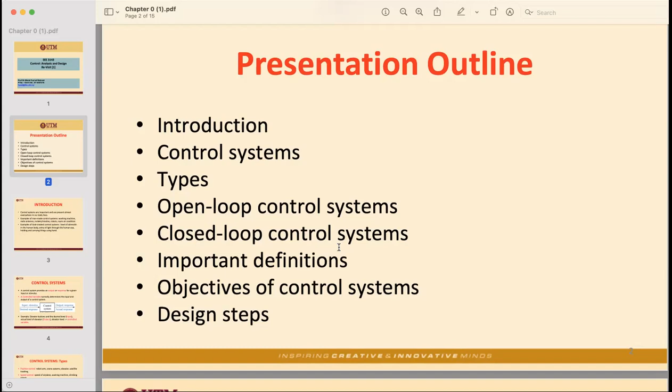So in order to understand this particular subject, you must have a good understanding on the modeling and control, which is last semester. Minimum pass, okay.

So as you know that control systems is everywhere in our lives. It's very vital, important. For example, in aircon system, for example in the vehicle, and many system, transportation and so on.

Basically on the man-made control system, washing machines, antenna for radio, or for the satellite, for astro dish and so on, for the military rocket and missiles, and particularly on the robots in the manufacturing system.

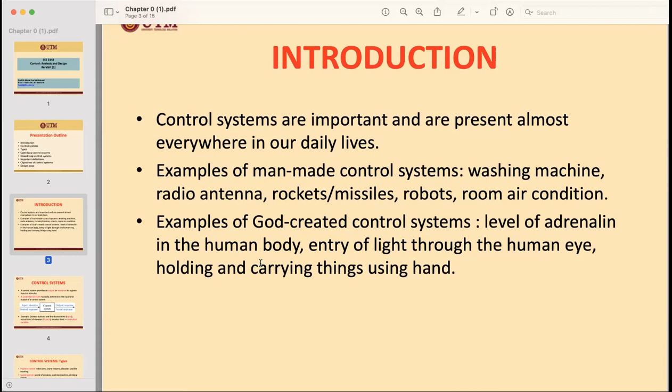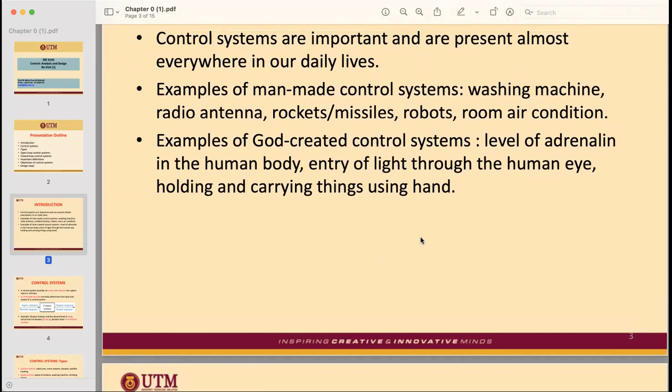Manufacturing factory. So for human, is also we have a control system, which is on the sensor, on the human eyes, where you can control and maneuver, and carrying things using hand. And also our body have chemicals that is what you call as a hormone.

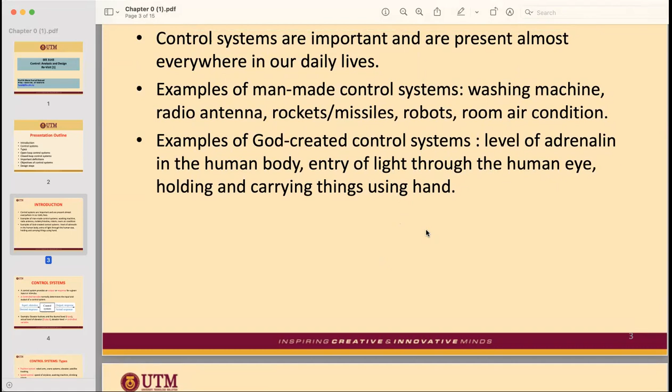For example, hormone to detect the blood pressure, the level of sugars in our body, all are using chemicals, which is also need to be controlled on top of the physical body of the human.

So basically, control system, when we talk, we must have input. That is a must. Input, which will stimulate the system, inside the control system towards the desired response, towards the desired set.

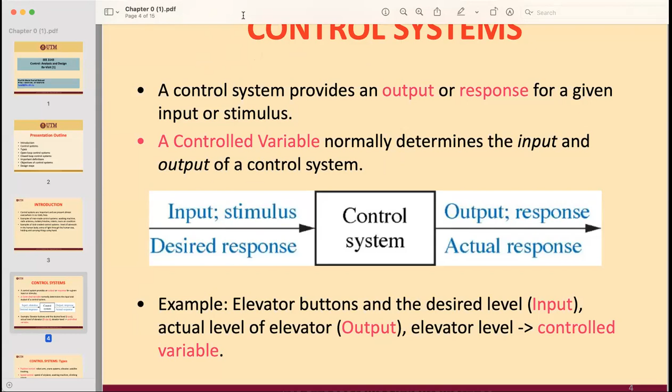And output response, which is the actual, the real behavior of the system, which will be the output. So, for example, in the elevator system, which is in many buildings, particularly in our faculty, we have 5 input elevator, level 1, 2, 3, 4, and 5.

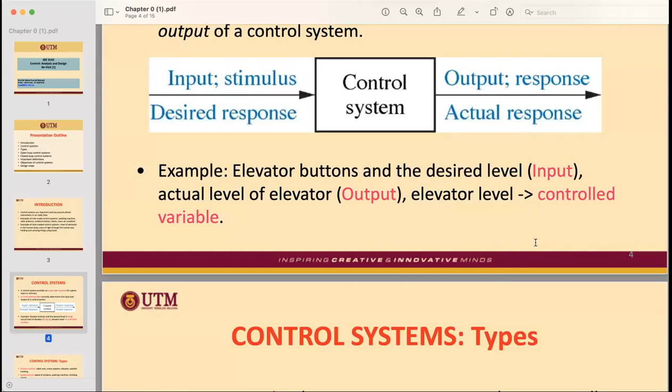So we press the level that we mentioned the input, and the output is the output of the elevator that will bring you to the required level that you want. And this is what we call a controlled variable.

So the types of control system, it can be position control, for example robotic systems, crane systems, elevator, satellite tracking, and so on, or speed control.

For example, for a car, aeroplane, washing machine, climbing robots, and so on. For example, in washing machine, you have slow rotations when it wash, and then high rotation when it spin, to remove the water from the clothes.

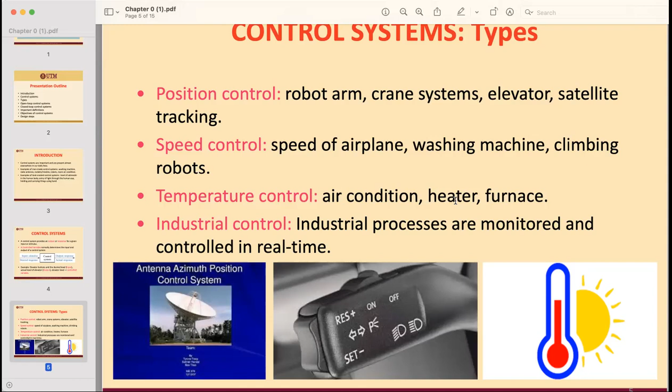And temperature control as well, where we control the temperature that we want. Let's say for a building, for a class is 23 degrees of Celsius. So the cold air will blow until the temperature of the room reaches 23 Celsius.

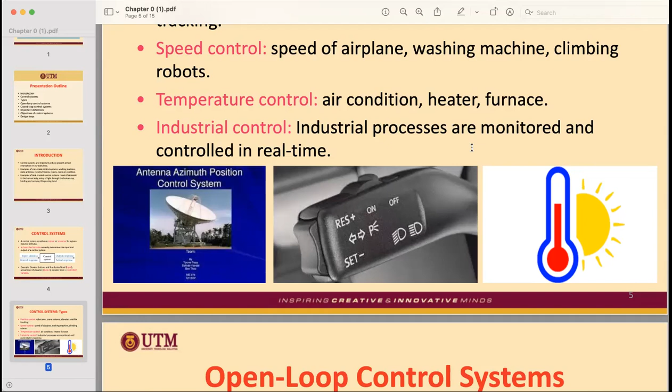And then for industrial control, for example in pharmaceutical industry, food industry, many process industry, all are monitored and controlled in real time, in the control room.

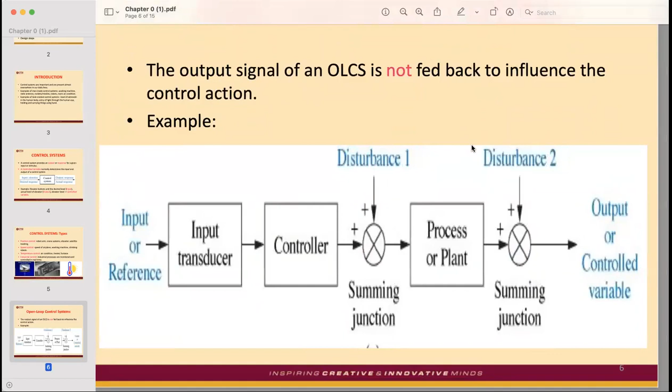So basically, we have the open loop and closed loop control system, where open loop is without feedback path. It's input, go to the controller, go to the process, and then output.

And for this particular system, a lot of disturbance from outside will enter to the system that create the noise, unnecessary signals, right? So the input or references is the signals that we want and the output.

But when the disturbance 1 and disturbance 2 enter to the system, it will mix with the input to create an output. So meaning that your output have 2 signals, the real output plus disturbance.

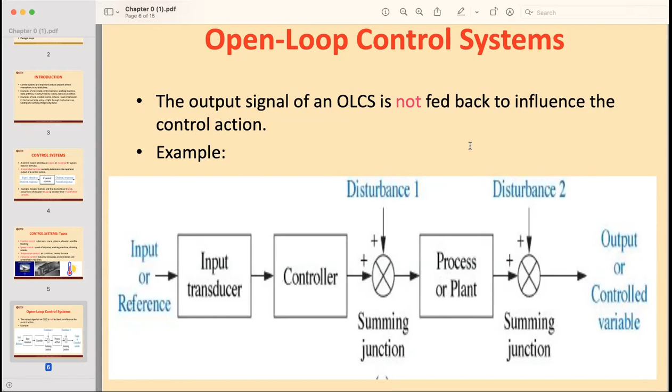So this disturbance must be removed as soon as possible. What is the example of disturbance 1 and disturbance 2? First is from the 3-pin plug of the wall, which will give you a 50 Hertz sine wave. So that will enter to the system. There you can see that the output signal similar like sine wave oscillations.

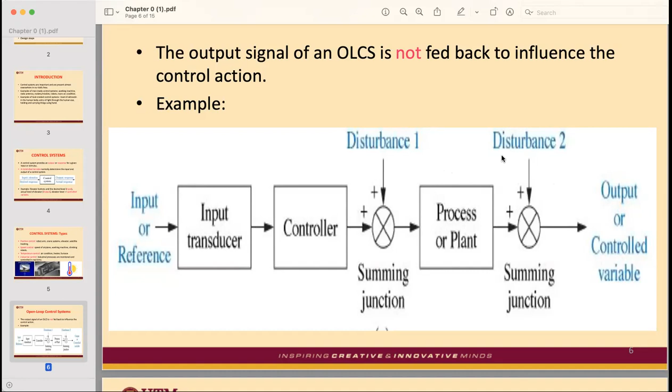That is because of the disturbance from the 3-pin plug at the wall. And it also can be come from the handphones. The microwave signals from the handphone also can enter to the system. So that's why when you conduct measurements of a control system, you must make sure that all these disturbances must be removed.

And the closed loop system is where the output signal is fed back to the input, okay? Feedback meaning like this - the red color goes to the input. So you can see the circles which consist of a cross inside, we call it a comparator. In reality this comes from the summing amplifier, the operational amplifier configured as a summing amplifier, so it becomes a summing junction. We have three here, one here and one here.

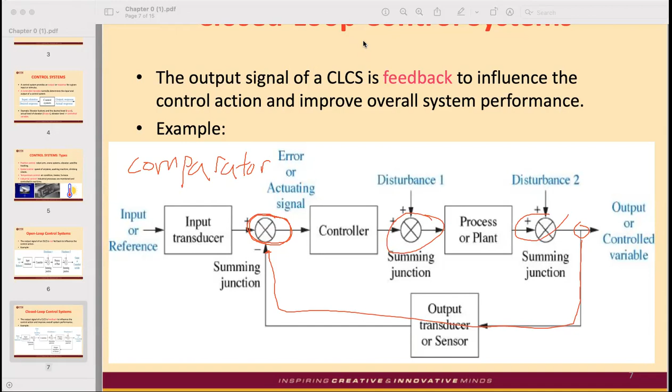So at the feedback path of the closed loop system, there must be a transducer or sensor. This must be hardware - there is no software that can replace the transducer or sensor. It must come from hardware, which will detect the physical signal and convert it to the electrical signal, consisting of voltage and current.

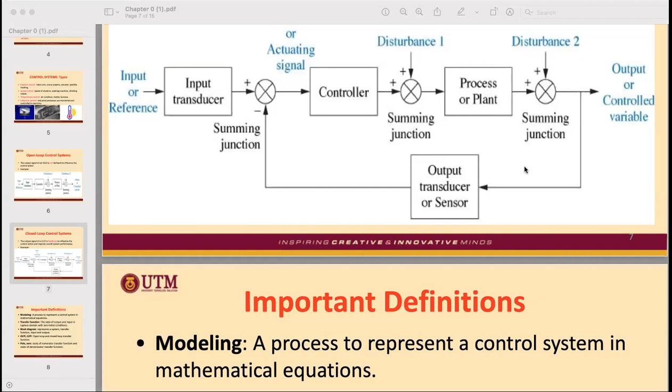Examples of physical signals: heat, the degree Celsius temperature, is a physical signal. What else? Let's say 5 bar - that's a pressure unit, pressure is known as a physical signal. Level, for example 10 centimeter, that is also known as a physical signal. All signals that are not electrical based, either voltage or current, are known as physical signals.

That's why some definitions need to be understood, that's why we revisit here. For example, modeling - this is the subject you learned last semester, where we model the system based on the transfer function and state space. So it represents the control system in mathematical equations. Even humans have their own mathematical equations, which are different from one person to another.

Boys and girls also differ in terms of their emotion, physical signals, emotion, and brain signals - it's not the same, the mathematical equations. And these transfer functions are actually based on a ratio of output versus input, with zero initial conditions. And the state space has a state equation, x dot equals ax plus bu.

And the output equation y equals cx plus du. So this is known as the state space representation. So we have two types of models here, transfer function and state space. Both can be used, it depends on the way you want to model it.

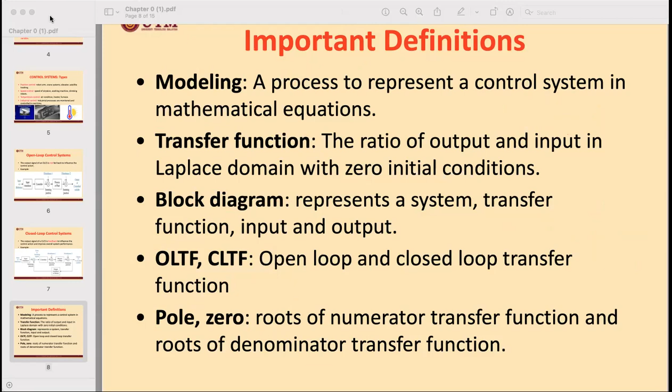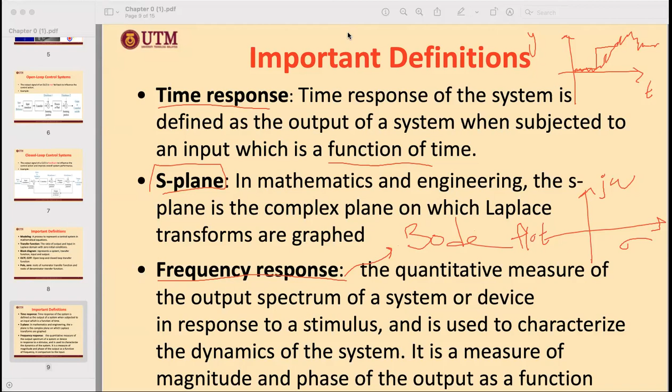And then it can be represented in the S-plane, as I told you before. S-plane is a complex plane in the Laplace transform where you have a real axis represented by sigma, and imaginary axis represented by j omega. It's a complex number that can be mapped to the graph using a linear graph. In our subject, we learn both the time domain and the frequency domain. Of course for frequency domain we don't use a linear graph, but we use a Bode plot to represent the frequency response, the output, which will be discussed in a future chapter of the subject.

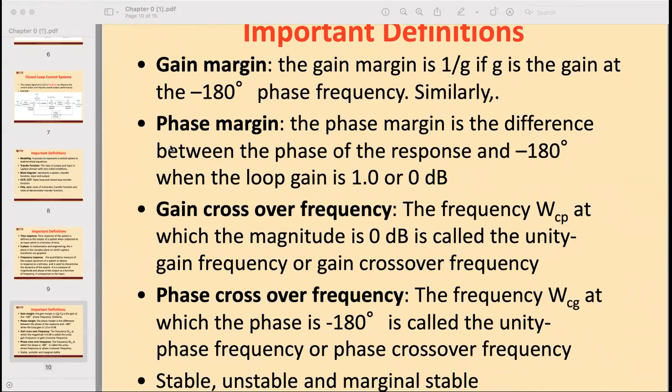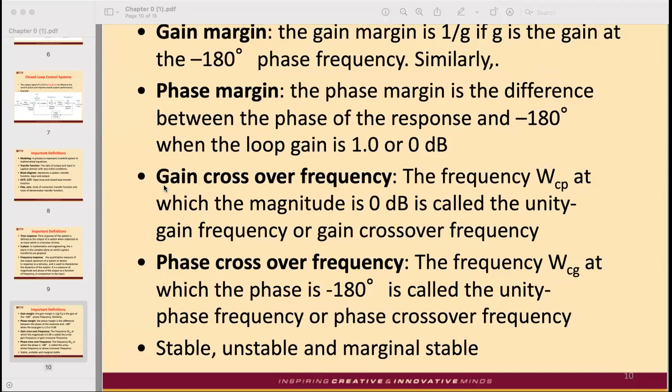And then we have a gain margin and phase margin, which are obtained from the frequency response Bode plot. Okay, and then we have a gain crossover frequency and phase crossover frequency. These five, gain margin, phase margin, gain crossover frequency, phase crossover frequency, and stability, are the 5 important components in the open loop Bode plot response. Okay, frequency response.

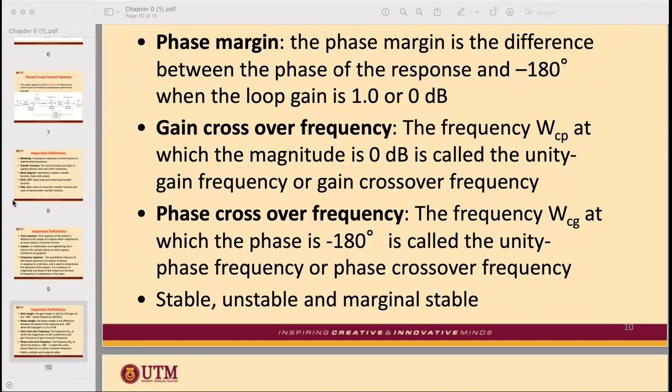So we will use this in chapter 3 and 4 in the design of compensator using frequency response, which will be lectured in chapter 3 and chapter 4. So from the time response and from the frequency response, our objective is the same. We want to make the system stable with a fast response, okay?

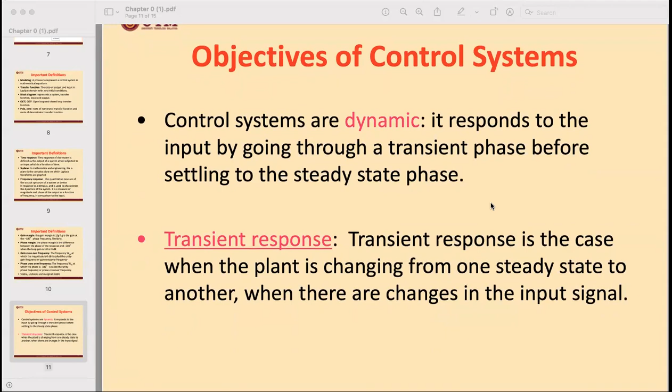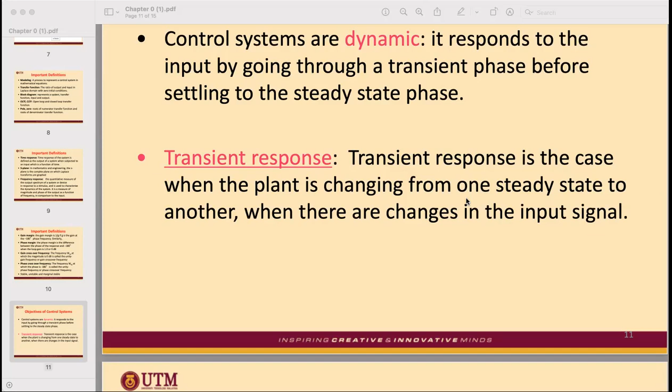Because control system is dynamic, okay? It depends on the input that you injected to the system. And we want to see that the output response settles as soon as possible, and then must have less steady state error plus be stable. Okay, so that's why we observe the transient response, to see whether the system has a steady state error or not. Steady state error is the error during the steady state phase of the response.

Stability. We cannot compromise with unstable system because unstable system is very dangerous to human life and towards the whole system. For example, if you go by aeroplane, if the system is unstable, it will crash down. The aircraft will crash down or suddenly vanish from the radar. MH370, okay? That is a mystery. Unstable system.

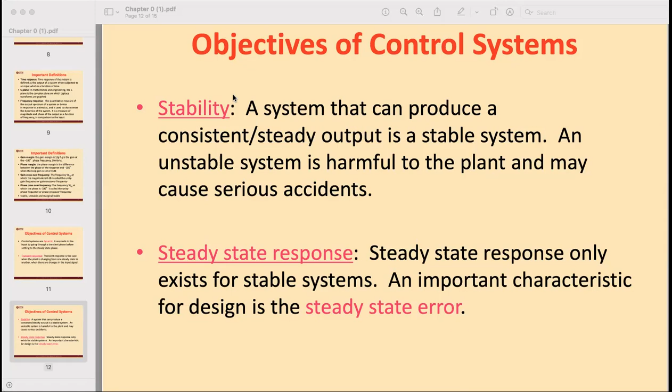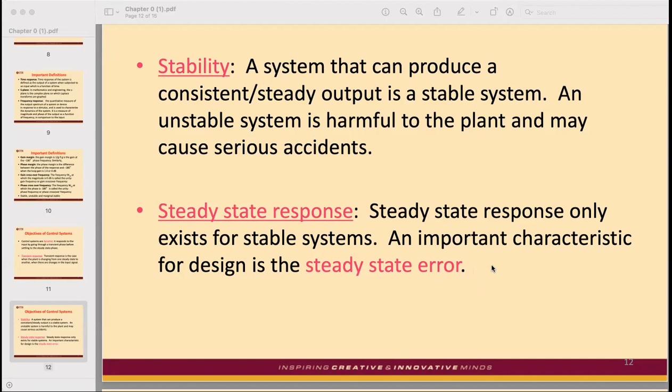So we must make sure that the system is stable for human life and safety, and then the system has a very small steady state error, okay? The good one is 0. The steady state error is defined as the difference between the input and output at steady state. The good steady state error is 0. But if you cannot achieve 0, something like 0.1 or 0.01 is already good enough. Can be accepted.

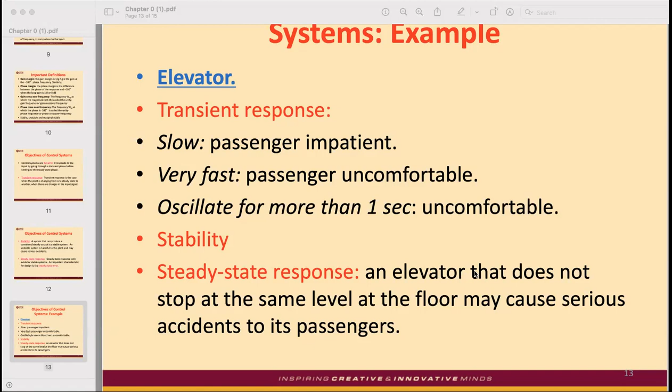Okay, so to describe the stability of the system, we look at the elevator. So elevator is based on the transient response. If the elevator is too slow, the passenger will complain and be impatient. If the elevator is very fast, we will feel uncomfortable, and it will cause vomiting. And if the transient response of the elevator oscillates more than 1 second, it will become uncomfortable. That's why stability of the elevator must be as good as possible, plus a good steady state response.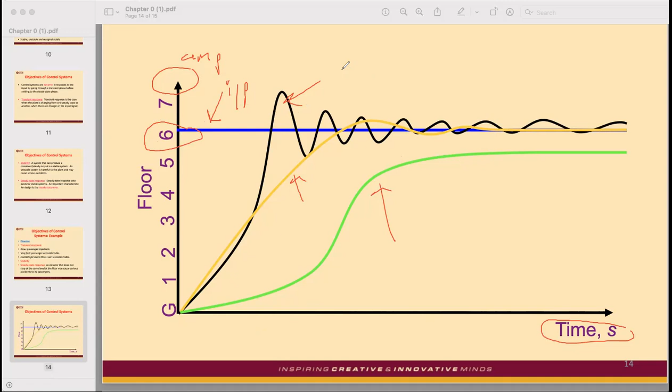One is oscillating. This one is slow. And the yellow one is acceptable. Not too slow, not too fast, but acceptable with 0 steady state error. You can see that for the green response, you have a gap here. So this gap is known as ESS, steady state error. Everybody follow me. ESS, steady state error.

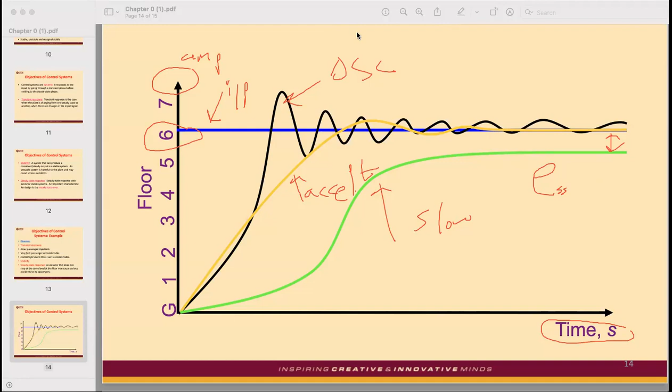Hello? Everybody follow me. ESS, steady state error. Yes. I can't hear you. Yeah. Okay.

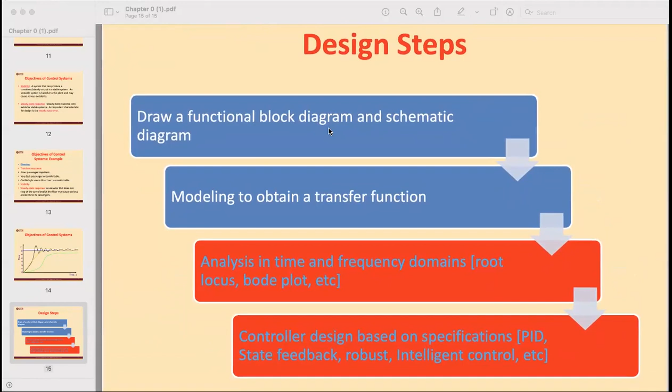So design steps. Okay, design steps are shown here. If you want to design a system, first you must draw the functional block diagram and schematic diagram. And then start to model the system. So you must obtain the transfer function. And then you analyze the time and frequency domain using root locus and Bode plot.

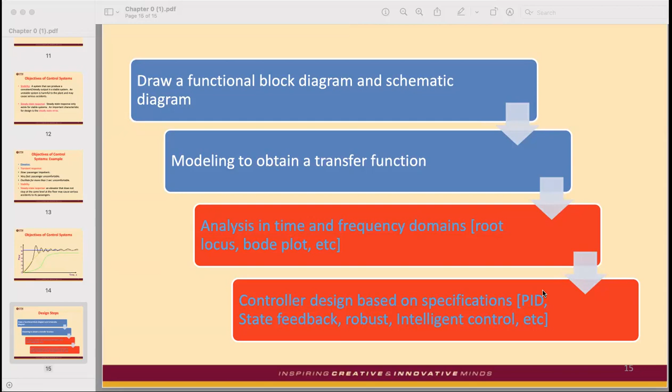Root locus is the tool to design in time domain, while Bode plot is the tool for design in frequency domain. And then after that, design the controller. So PID or state feedback or robust or intelligent control system. In our subject, we focus on transfer function and PID controller. The other controllers will be learned in the elective subject. Okay, that is a revisit of the introduction. Any question?

Any question, guys? No, for now no question. Okay, if no question,

Iqbal Ihsan, brother Iqbal. Yes, Doctor. I have one question for you. What is the hardware that will be used in a control system to represent a summing junction? Okay, cannot answer. Brian? I think comparator. Using what hardware? Component. Using operational amplifier, I'm not sure about that. Using operational amplifier. Yes.

Brian. There are two Brians. Brian Chong Ting Tong. Yes, doctor. I have one question for you since you have no questions. My question is, what is the S-plane? Explain. It's for the Laplace transform, to find the poles and the zeros. To map, to find the position of zeros and poles. Mapping. Yeah. The tool for mapping the location of poles and zeros. Thank you, doctor.

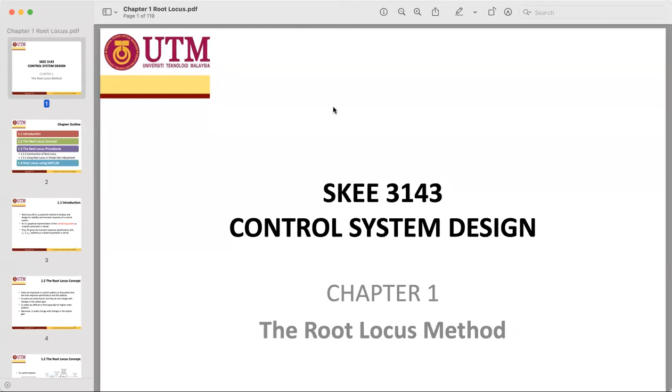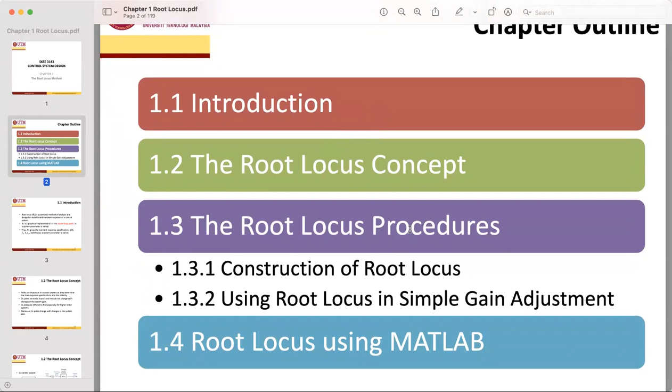Okay, let's go to chapter 1. Can you see chapter 1? Yes. Right, chapter 1 is about the root locus method. So in chapter 1, we will look at the introduction, the concept, the procedure, how to draw the root locus, to construct it, and to adjust the gain of the control system. And then, of course, we have to use software to assist our design and construction of a root locus, using MATLAB.

So what is MATLAB? Another Brian, can you answer me? Second Brian. Yes, doctor. What is the definition of MATLAB? MATLAB is an acronym. MATLAB is a software used to simulate. No, what is the acronym? M stands for what? T stands for what? LAB stands for what? I'm not sure about that. You're not sure? Okay.

Vicky Woon. Yes, doctor. What is MATLAB? I think it's matrix laboratory. Matrix laboratory, absolutely correct. Okay, it's a matrix laboratory. So please take note.

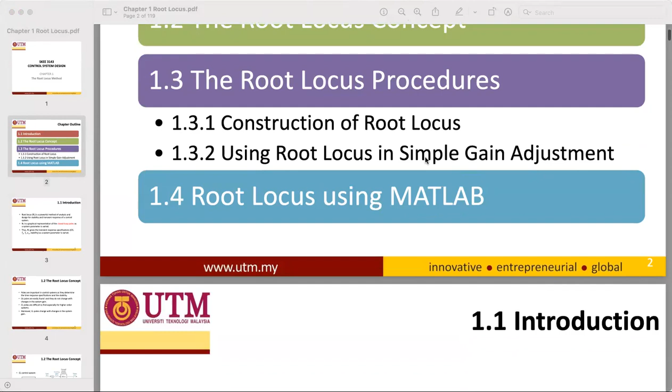Right, so as the introduction, what is root locus? Root locus is a method of analysis and design for stability and transient response of a control system. So when we have the mathematical model, the transfer function, output over input, you have a polynomial of the numerator, the top one, which represents the zeros, and the polynomial of the denominator, the bottom one, which represents the poles. So from these values, poles and zeros, we map to the S-plane, which is imaginary axis versus real axis. That's why you get a root locus drawing from there.

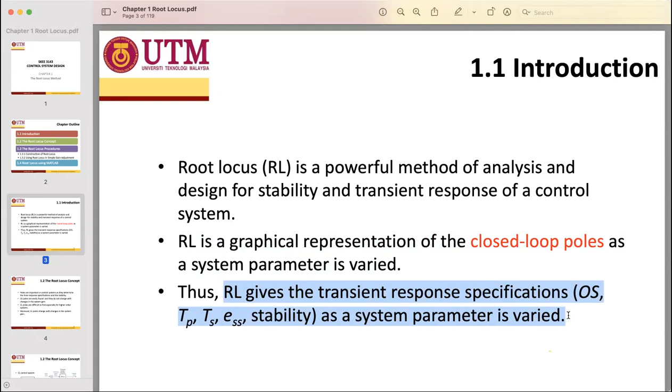specifications. For example, OS. OS is not operating system. OS is the overshoot. TP, peak time. T is time, P is peak. So the short form is TP, peak time. TS is settling time. ESS, E stands for error, SS stands for steady state. And then the stability of the system, to make sure that the system parameter is varied.

So the concept of, the concept is

Okay, poles are important in control systems as they determine the time response specifications and stability. So open loop poles are easily found. They do not change with changes in the system gain, while closed loop poles are difficult to find, especially for higher order systems. So here are examples of the difference between open loop poles and closed loop poles. Open loop poles you can take from the system transfer function and then map straight away, while closed loop poles are challenging because they are located along the root locus, with different gain values.

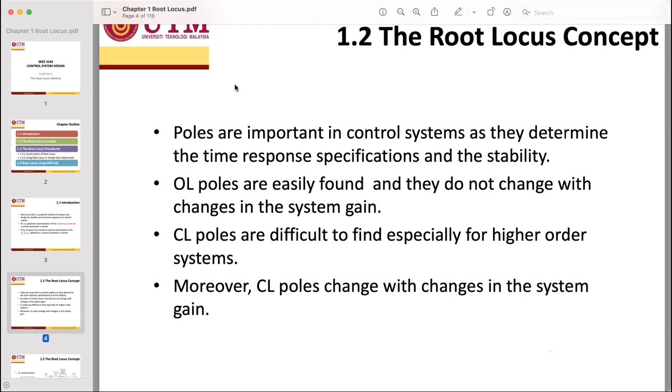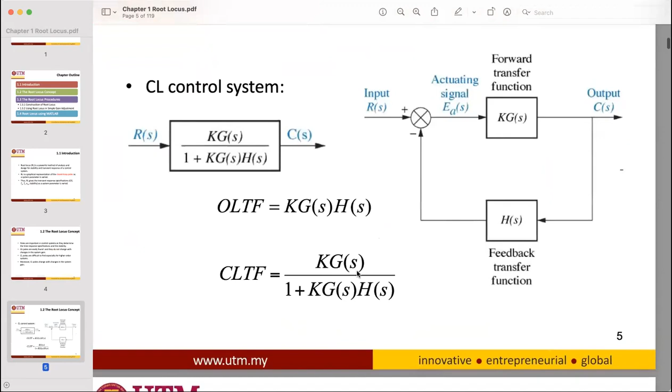So closed loop poles change with changes in the system gain. Once the gain changes, the closed loop pole values will change as well. For example, here you have a control system which is closed loop. C over R, which is equal to KG(s) over 1 plus KG(s)H(s). What is KG(s)? KG(s) is the forward transfer function. What is H(s)? H(s) is the feedback transfer function. What is this? This is the summing junction.

What is a summing junction? A summing junction is a summing amplifier from the operational amplifier, and there is the input and there is the output. And there is one wire here connected at the feedback, and then you can see these signals, we call them actuating signals, Ea. Actually it is the error, which is represented by the difference between the input and output. So as I told you before, the difference between input and output is the steady state error, and we call it the actuating signal, Ea, that gives the information to the controller and the system transfer function.

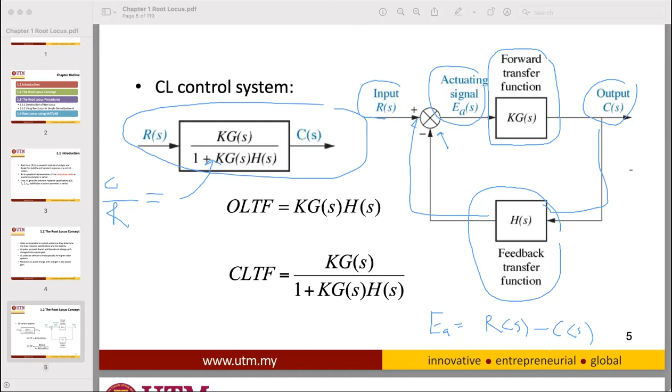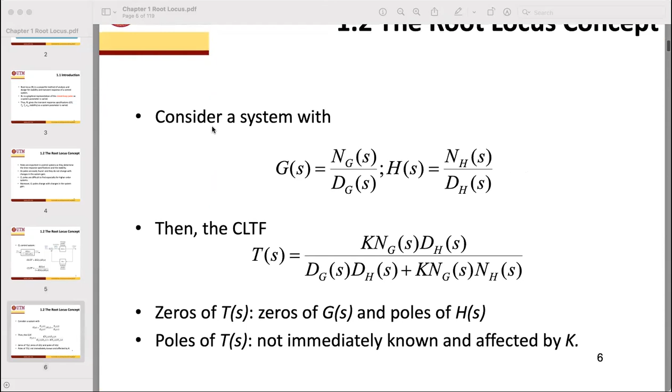Right, so the root locus concept is basically mathematics. We consider a system G(s), which is N over D, the open loop transfer function, and the feedback is H(s). So the closed loop transfer function is G over 1 plus G multiplied by H, which will give this type of equation, the closed loop. So this one is given, this one is given, and this one you have to derive, the closed loop transfer function.

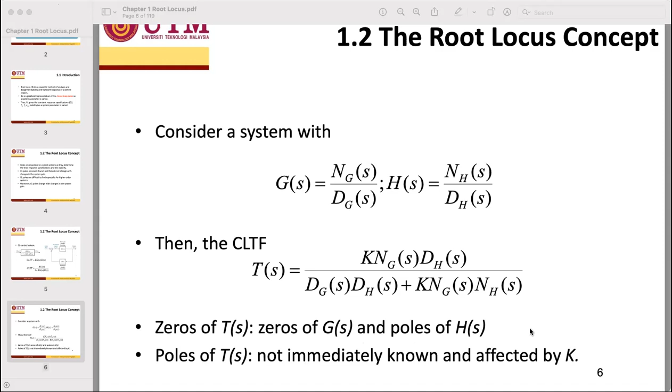So what are the open loop zeros? Open loop zeros: S plus 1 equal to 0, S equal to minus 1. What are the open loop poles? Open loop poles: S plus 2 equal to 0, and S is equal to 0 and minus 2. So this is the closed loop poles, and this is the open loop poles, and this one is the open loop zeros. So when we plot, you have a real axis, imaginary axis, and it will be located over here, zero at -1, -2, and over here, a pole at the origin. 0 is the origin, the center of the S-plane where the value is 0.

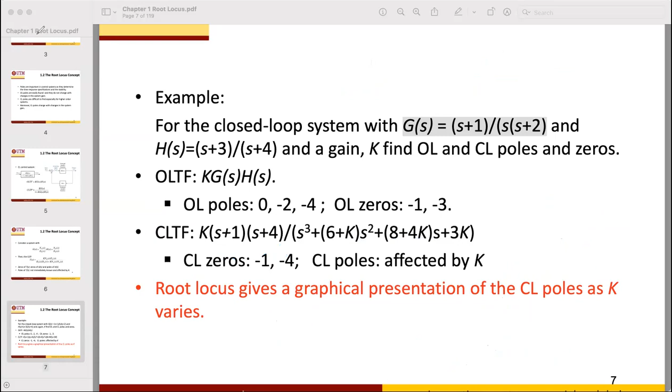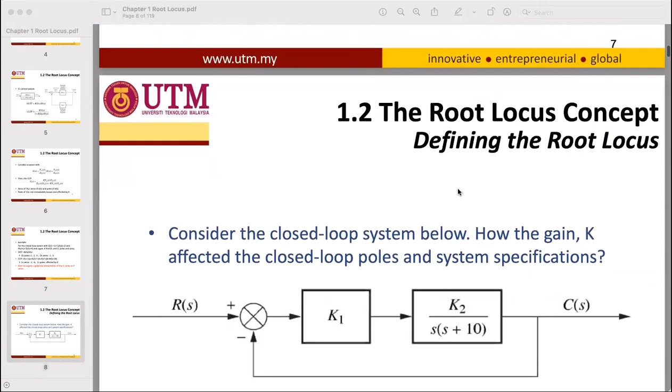Right, and then the concept to define the root locus is given by these examples, where you have two gains here, which is K1 and K2. Okay, this is K1, and is the gain for the control system. And from here, what is the open loop zeros? What is the value of open loop zeros? What is the value of the open loop zeros? So 0 and -10. Open loop zeros does not exist.

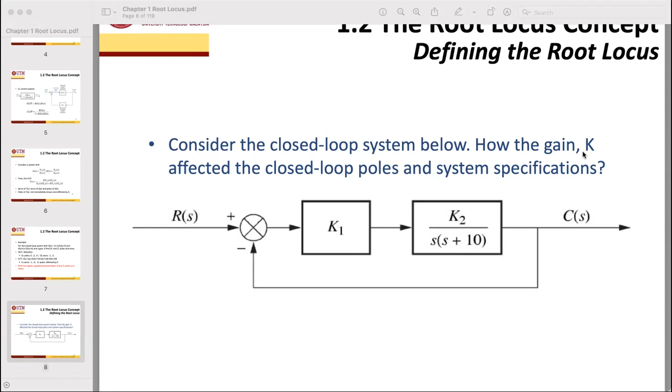Open loop poles is 0 and -10. Open loop poles. Okay. And open loop zeros does not exist because there is no polynomial with K2. Okay. So how does the gain K affect the closed loop poles and system specifications? So first you have to find the closed loop. So this is open loop and this is the closed loop.

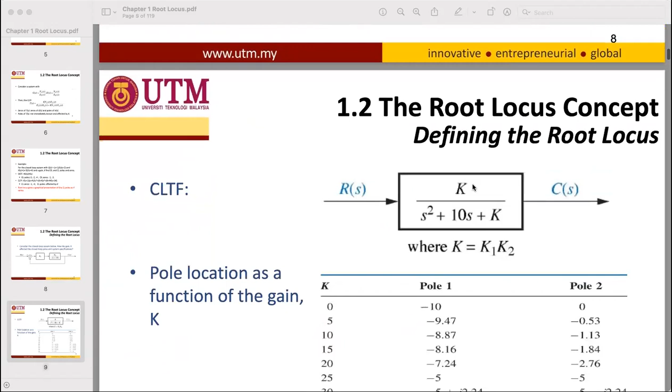So you let and assume K1 multiplied by K2 is equal to K. Okay, and then you find the closed loop. So you will get K over S square plus 10S plus K. So this S square plus 10S plus K equal to 0 is known as the characteristic equation. Repeat after me. Characteristic equation. Guys, characteristic equation.

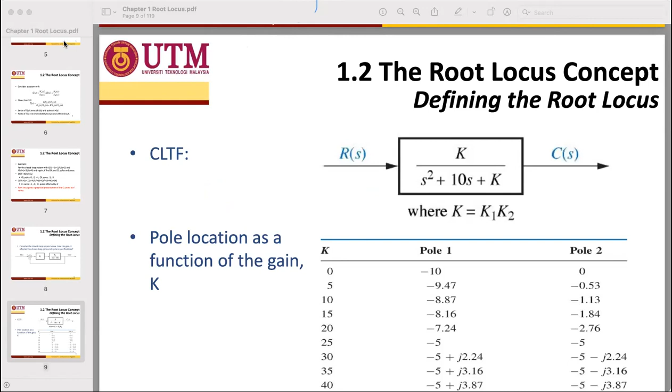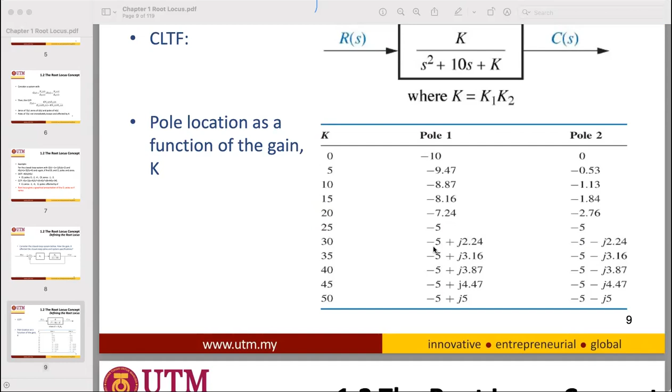So when this equation equals 0, it will give you the value of the closed loop poles. So when you give different values of K, it will give different closed loop poles, which are located as here: K = 0, -10 and 0; K = 5, -9.47 and -0.53; and when you increase to 30, it will give you closed loop poles in complex numbers, until 50. So this is the data.

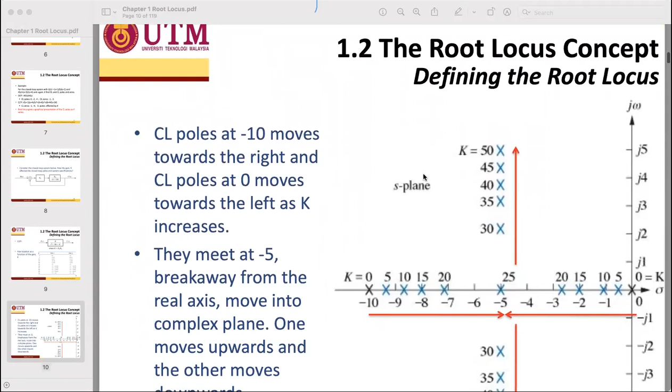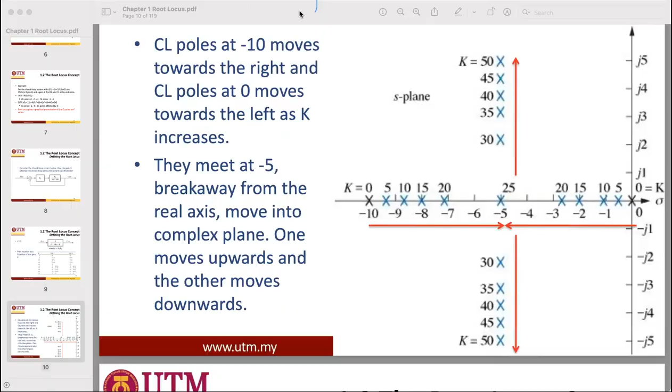So the data we plot into the S-plane, which is shown here. Okay, from -10 to 0 along the line, you have many closed loop poles, the blue color, which have different values of K. Okay, so the root locus paths from -10 and 0 will meet each other at -5, and then one will go up and one will go down. Okay, so it will give you different values of gain K. Okay, right. So any questions before we end the class?

Chong Jin Su. Yes. Any question, Chong? So clear. Maybe I need to read it again. I have one question for you. Let me try. What is actuating signal? Miss Chong, what is actuating signal? Input minus output signal. Isn't it? Gives you the actuating signal.

Elisa Rosalie. Elisa, any question? No? I have one question for you. What is origin? What is origin? Origin. Center of the graph. Center of the S-plane. Center of the S-plane.